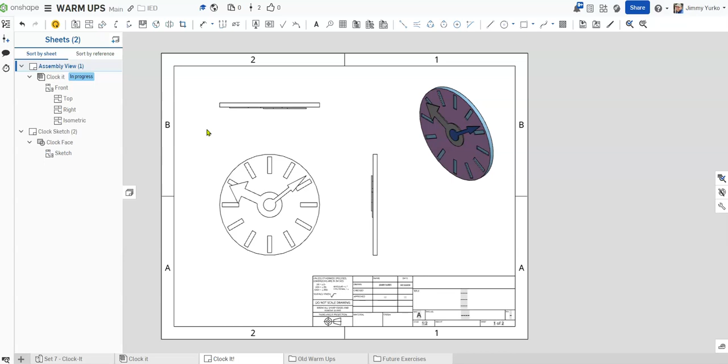Today we're going to show you how to create drawings for your models. Drawings are super important. They allow us to print our models out so that someone else can build them, or so that we can have a reference while we're trying to construct a model. Drawings allow us to export our files to different CNC equipment such as laser cutters, milling machines, or 2D cuts. The drawing converts our 3D model into a 2D workable model.

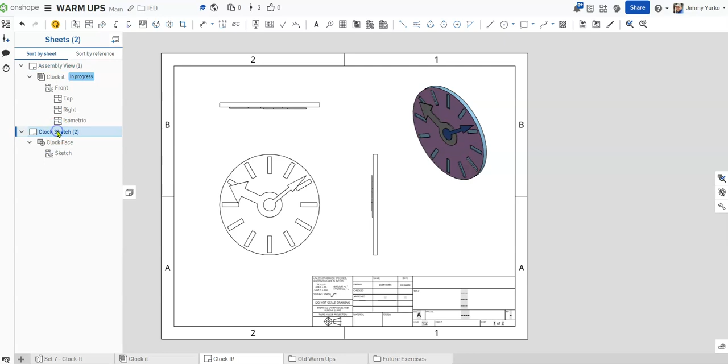Things such as this sketch here showing us the front, top, right side, and isometric view of our clock that is assembled. In this case, I've been able to create a printable drawing that I could provide as an instruction sheet for constructing the clock we've been working on. It also allows us to set other things, like telling people what materials or finish qualities we want out of a product. So it's a super important thing.

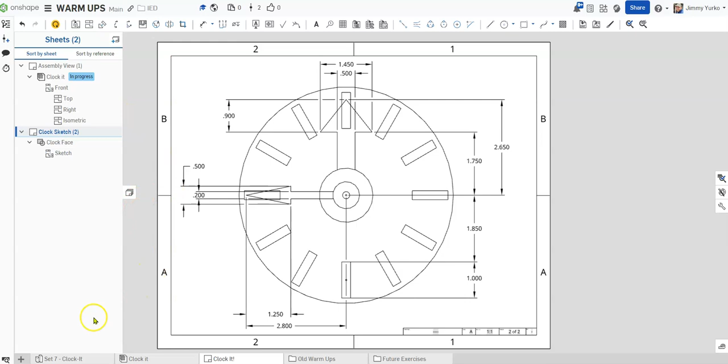Without further ado, we'll show you how to get this started. In the bottom left-hand corner of your Onshape screen is a plus sign. We're going to choose Create Drawing. For this demonstration, we're going to use the standard ANSI A inch, which is the standard 8.5 by 11 copy paper that you see in most offices and schools. Click OK.

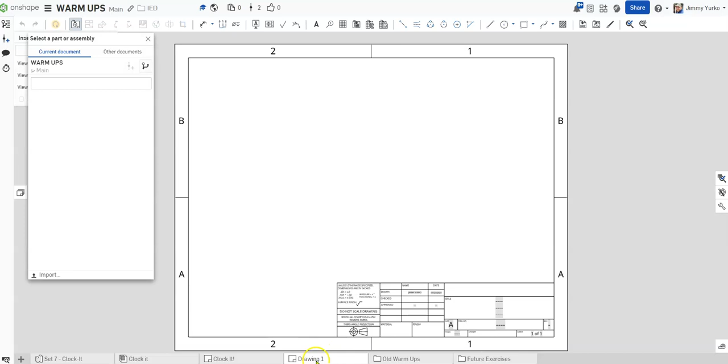When it opens up, you can see we've got a new tab called Drawing 1, which we can right-click and rename to whatever we want. I'm just going to call this one Demo. You can call yours what you need it to, like Clock It, or whatever your part, design, or product is. Typically, you would name it whatever the design or project you're working on is.

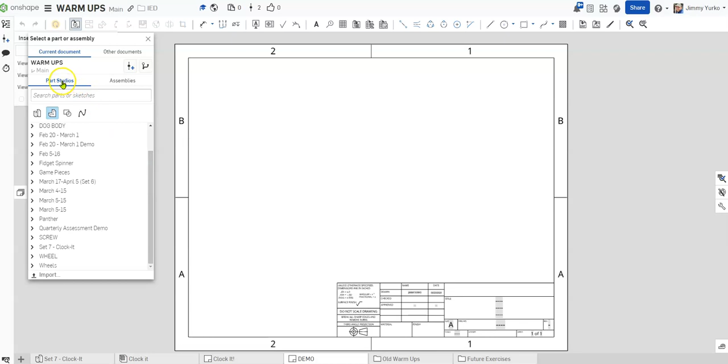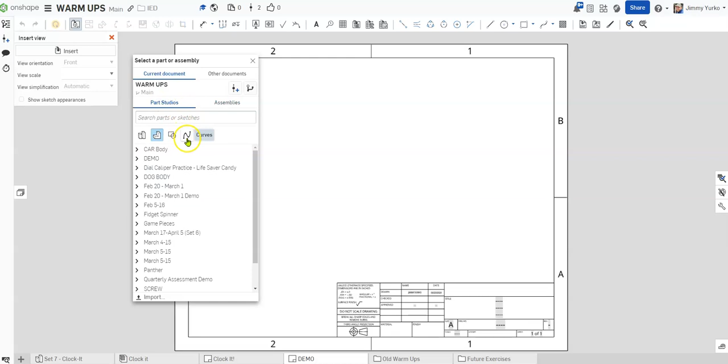Then you come on over and you see this insert box pops up automatically. If this isn't here, we can access it from the insert view button. When you choose insert a second time, you have the ability to go through your library and find your components. If you're new to this, you won't have very many, but you can look at existing part studios and assemblies that you've created. You can narrow it down to sketches, curves, parts, and entire part studios.

In this case, I'm going to start off by looking at my clock assemblies. I'm going to go to Assemblies, and I'm going to choose my clock.

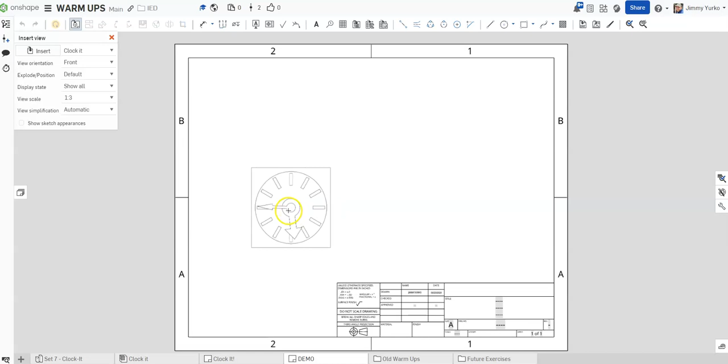Then I'm going to choose a scale. Now if I come over here, you can see that looks a little small. If I'm happy with that size, all I need to do is click and release to set it. If I'm not happy with the size, I'll do that again - insert, assemblies, clock - and I can change my size in the view scale model. I'm going to go to half scale.

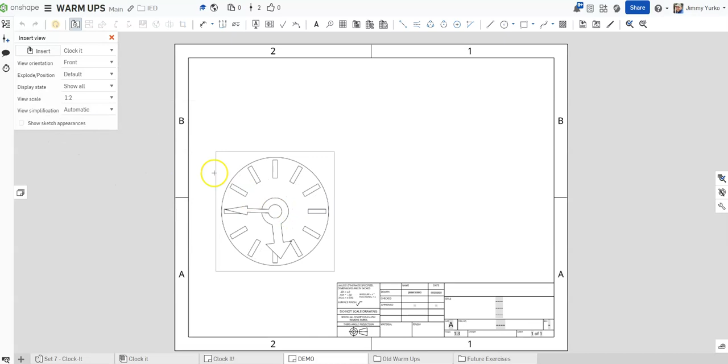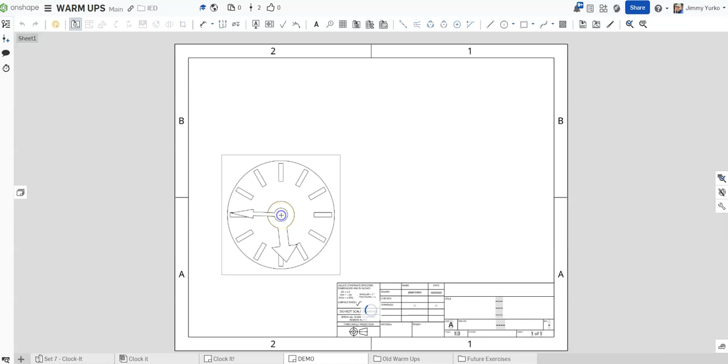I can change my view orientation for my first view. Remember, right now what I'm choosing is what the first view I'm going to place in is. So I want my front view in this case, and I'm going to put it in the lower left corner, and all of my views will be driven from this one. There's my first view. Once I place that, you can see we've gone from the Insert tab tool over to the Projected View tool.

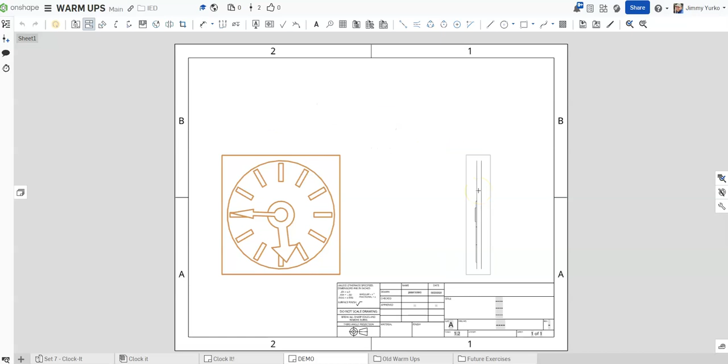My next click will put another view. Wherever I place the mouse and click is what view orientation is going to be selected. So I want a top view. Now you can see that no longer is it automatically picking - I'm back in my projected view option. So I'm going to go back to my front view, and I want to project a view away from the front view. I'll click on the front view and show the right side of that front view.

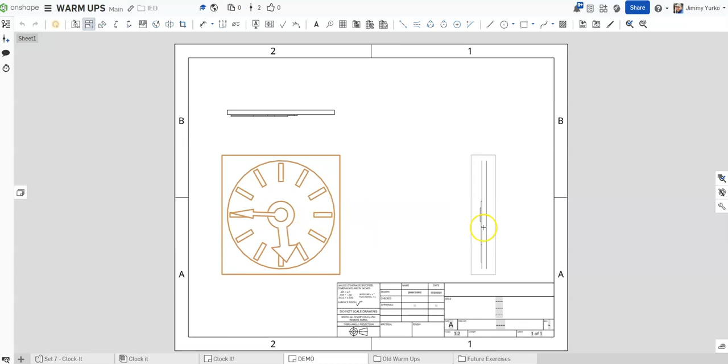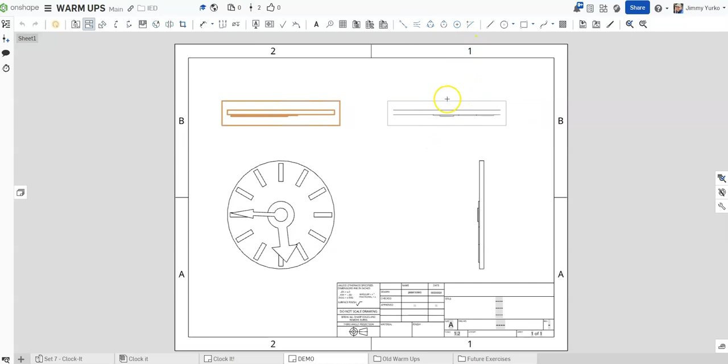Now I want an isometric view that shows these three positions all kind of merged together. So I could choose either of these, but that will wind up giving me a weird looking view that isn't what I want. That's not right. Let's go back and try projected view from this one. Oh, that's definitely not right either. What's that look like? That one actually doesn't look too bad.

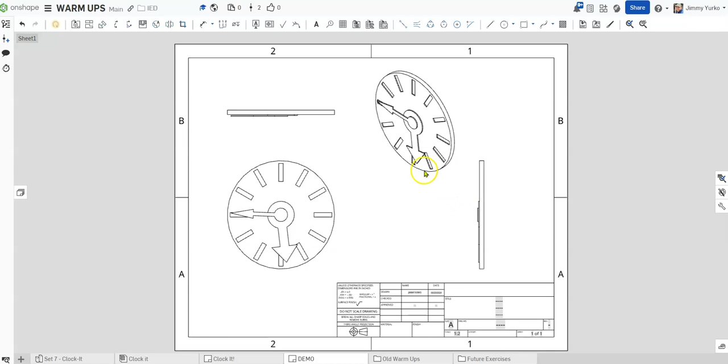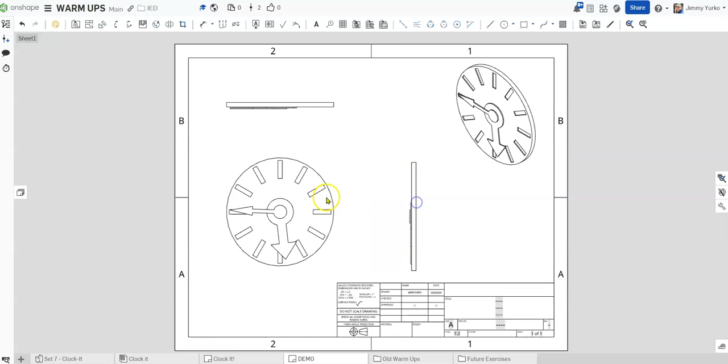Usually I would come over and choose this view, and you can see I get the same thing. So both of these would be appropriate - I'll need one of them. So that's what I want. I want a view that shows the front. What I want to show is the front view, the top view, and the right side view. And we want to show an isometric that shows a little bit of the front, the top, and the right all in one. There's different isometric positions, and for our purposes today, this is the one we want.

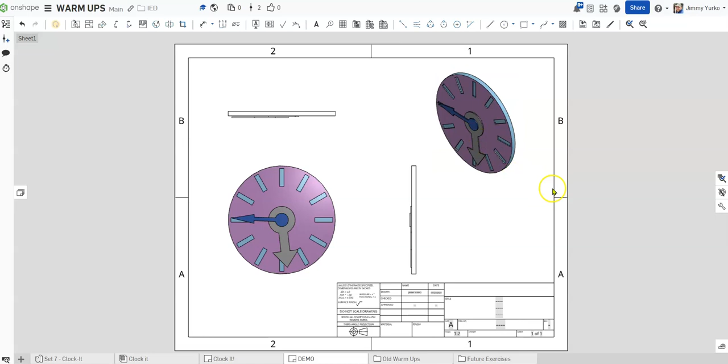The next thing I would like to do is come in and shade this. I'm going to click Show Hide, and choose Show Shaded View. You can see what happened here is since this was selected, I want to Show Hide and Hide Shaded View on that one. I accidentally turned that one on, no big deal. I only want the shaded view on my pictorial. These are typically not provided with a shaded view.

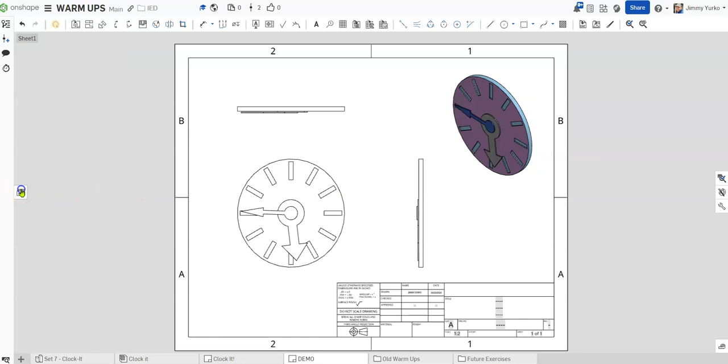So there you have it - that's how you place some views into a sketch or drawing sheet. If I'd like to add additional drawing sheets, I have to expand my drawing pane on the left-hand side and choose Insert Sheet, which lets me add new sheets to my set. I can go up to my Insert View option and choose from all of the things we did originally.